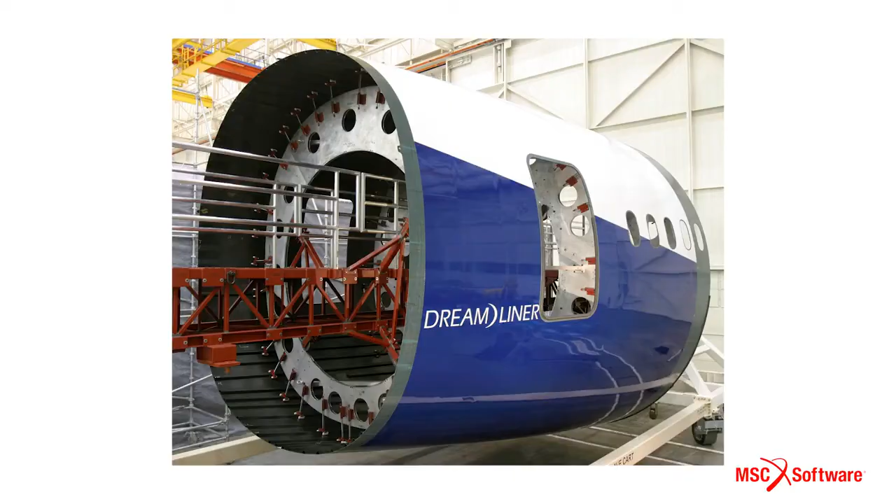The aircraft industry in recent years has increased reliance on carbon fiber composite materials. Composites also offer the potential for reducing part count, increasing fatigue resistance, and reducing maintenance frequency.

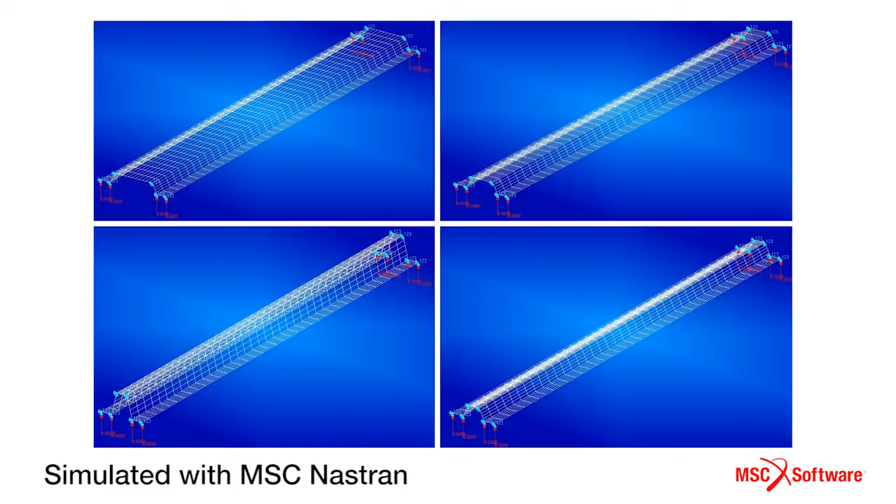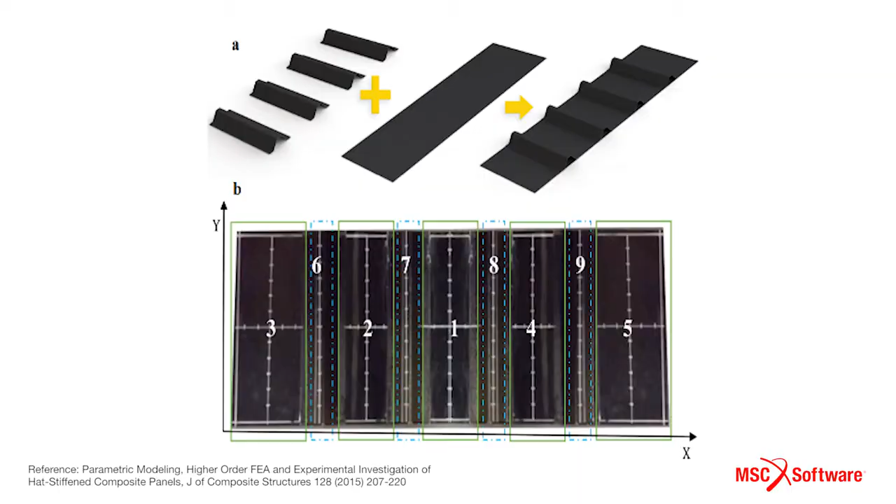Through the simulation using NASTRAN and PATRAN for the aerospace parts, we want to develop a design space for different parts for the aerospace industry, so that they have a database generated by our project. They can look into it when they are doing future design based on the work we have done, and use the methods that we invented to implement into their product design.

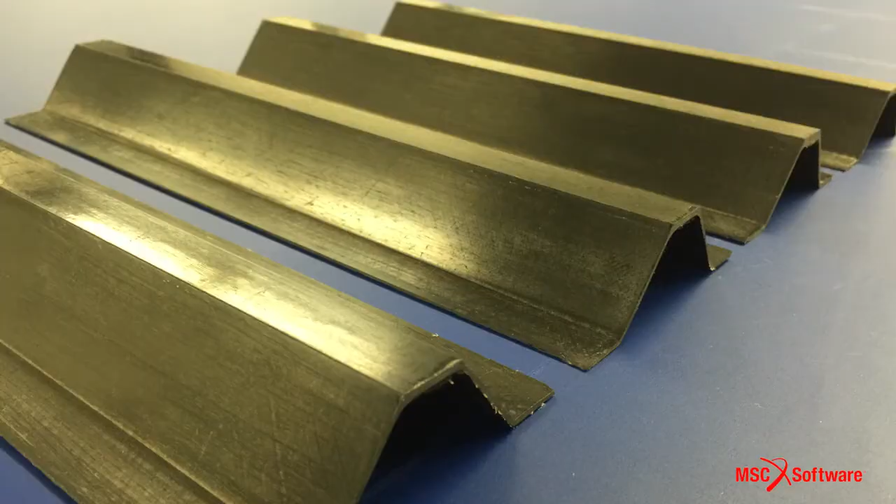In a modern airplane, for example, the Boeing 787, more than 50% of its weight is composites. So composites play a very large role in modern airplanes. And these hat stiffeners are the main stiffening parts that make your wing section stiffer.

The reason that we use NASTRAN and PATRAN is because it has a very good feature cooperating with different CAD software. So we have different models from different software that we can implement into PATRAN and NASTRAN for the calculation. The second reason we chose NASTRAN and PATRAN is its automatic parametric modeling feature.

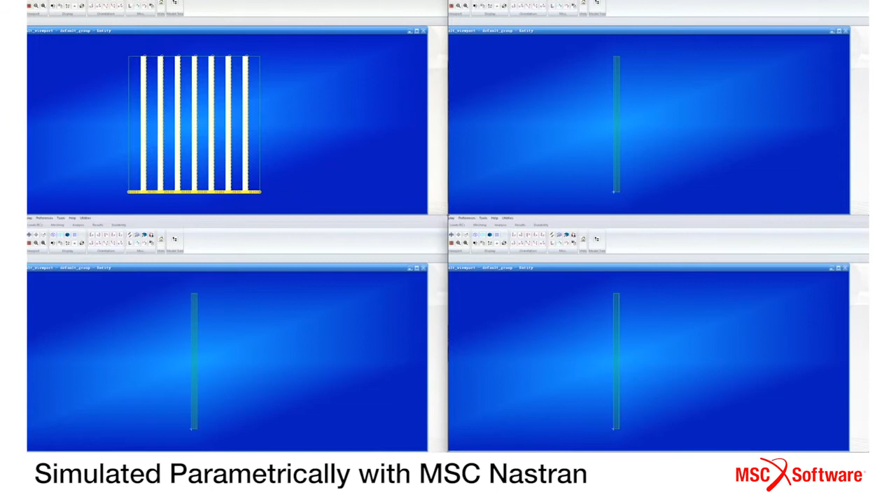Once we program the feature that we want, the computer can just run by itself 24 hours and generate thousands of different shapes and configurations for the aerospace parts. And we're trying to find the best one among these different parts. So it's called optimization design. We can send all these models to NASTRAN for the calculation, and when we get the feedback, we will know which shape is better.

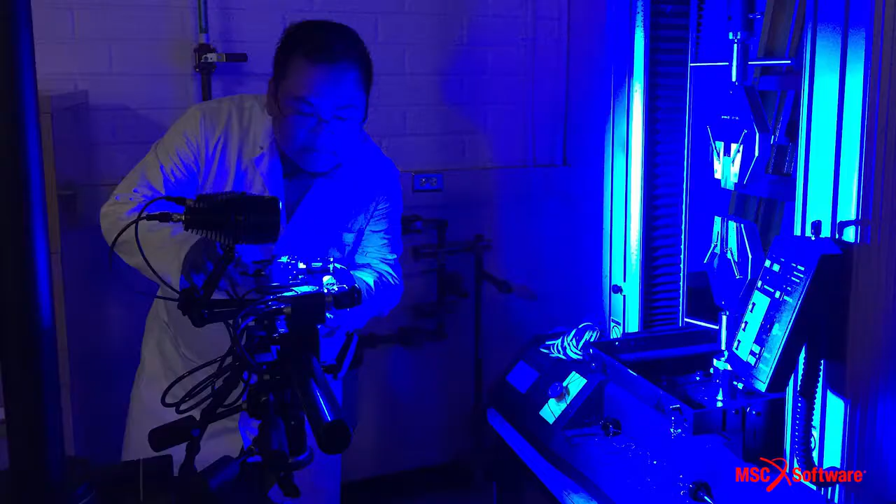Projects can be initiated in a couple of different ways. In some cases, an agency, for instance the Navy, issues a solicitation. In the case of Bo's project, this was, as I mentioned, an SBIR project. These are typically led by the business entity and supported by the university entity. This one was a company called NextGen Aeronautics.

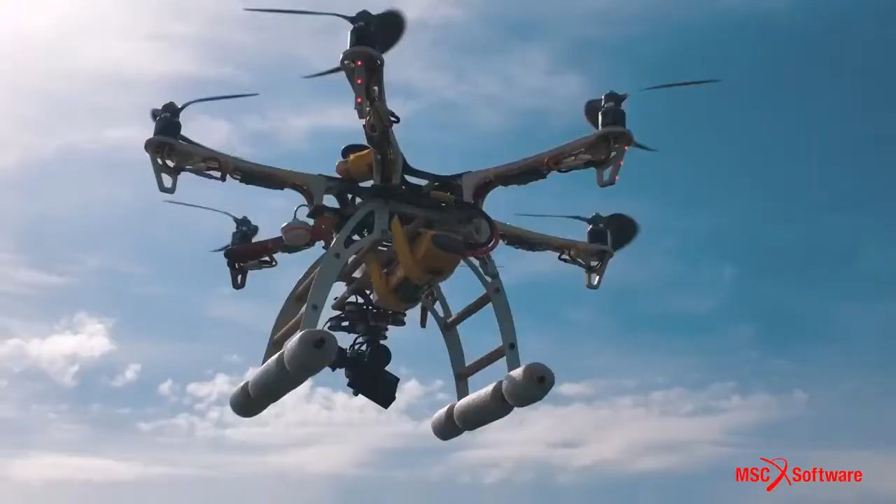They're basically a small business research company that specializes in small aircraft, drones, unmanned vehicles, and things like that, and in the research to support those types of vehicles. Being able to say that we are proficient and competent in the use of the MSC software was extremely important to the success of the proposal and to the project.

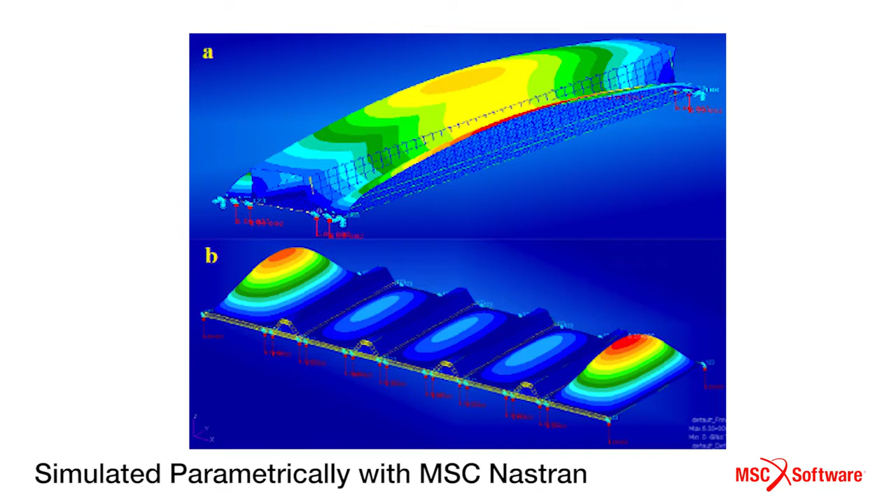In the context of a simulation, we're able to perform hundreds of iterations that are just prohibitively expensive to do in experiments. That enables us to screen and optimize much more quickly and cheaply than real experiments. The simulation in NASTRAN and PATRAN actually reduces the iterations of realistic testing and provides very good guidance for our future design of hat stiffeners and aerospace parts.

Using the simulation allows us to save tons of money, millions, because we don't have to spend that much human resource, material resource, and time resource on all the real tests, but instead we can do the virtual simulation in computers to get the results as guidance for the future design.